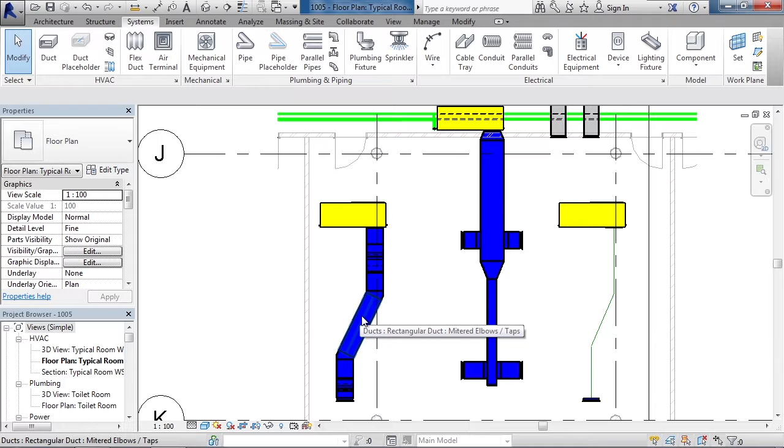Click Modify to deselect. Now, on the duct system on the left, click the same element for the duct, the one that's on the horizontal angle. Dimensions will appear for it, and the properties appear. Now here, you see the horizontal and vertical justifications for this element, which you didn't see for the placeholder duct. And if you scroll all the way to the bottom in the property area, you see two areas, one for insulation and one for lining.

So again, you can only add insulation and lining to duct elements that are actually created with a duct or a placeholder duct that's been converted to a duct. So let's look at how we can add insulation or lining to a single segment of the duct run or the entire duct run or duct system, basically depending on what you choose. So I chose this one element right now. If it's deselected, just go ahead and select it again.

When you select any element of a duct system, i.e. a piece of duct, the ribbon will change, and on the very right, you'll have an option for duct insulation and duct lining. To add either one, all you have to do is click the Add button, again for Add Insulation or Add Lining. In this example, let's click Add Insulation. Now again, the first thing you would want to do is make sure you click a piece of ductwork so you see this displayed.

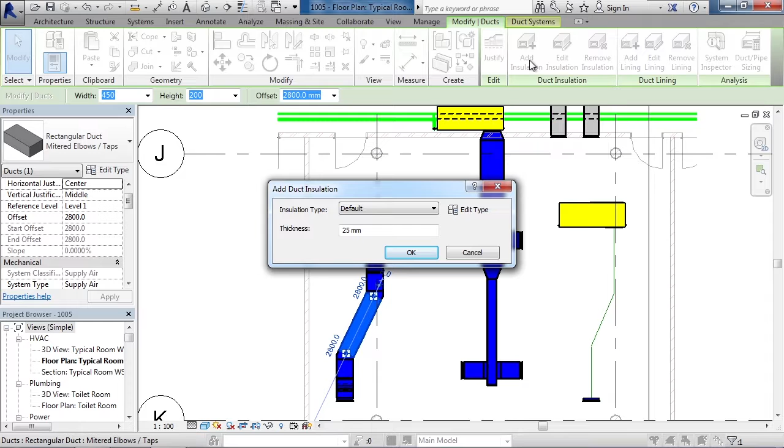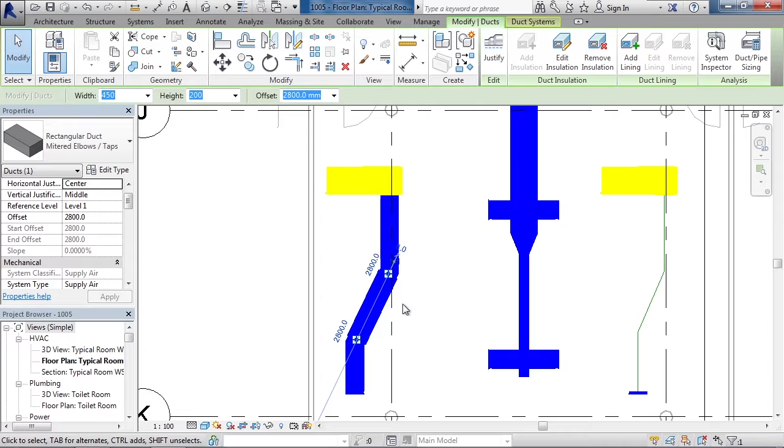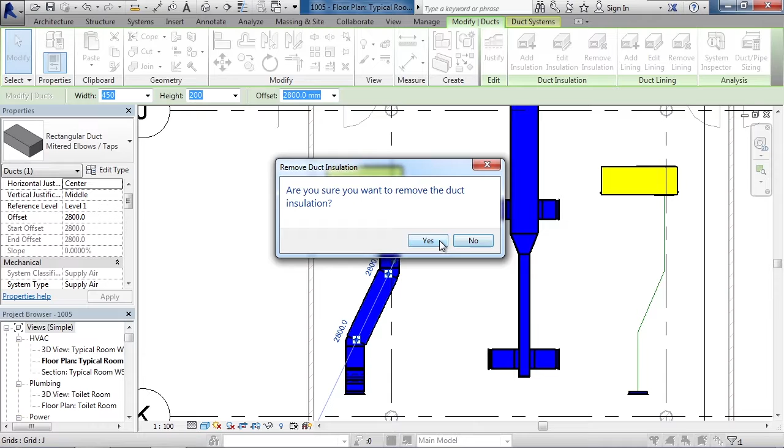Now if you zoom in closer on this duct segment, you'll actually see a dashed line that represents that insulation or lining, depending on what you add to this ductwork. I'm just going to zoom back out. Now, since the insulation or lining has been added, the ribbon now changes, giving you additional options, where you can come in and actually edit the insulation, or you could remove the insulation. So if I want to remove the insulation here, I can just simply click Remove Insulation. It's going to ask you to verify you want to remove that from the actual duct segment or duct system, and then it's technically removed.

And again, I can repeat the same process using Add Lining, where it will ask me again what type of lining type that I want to add and the actual thickness. Again, I can edit the type or add a new type or change the thickness. I'm just going to click Cancel in this example.

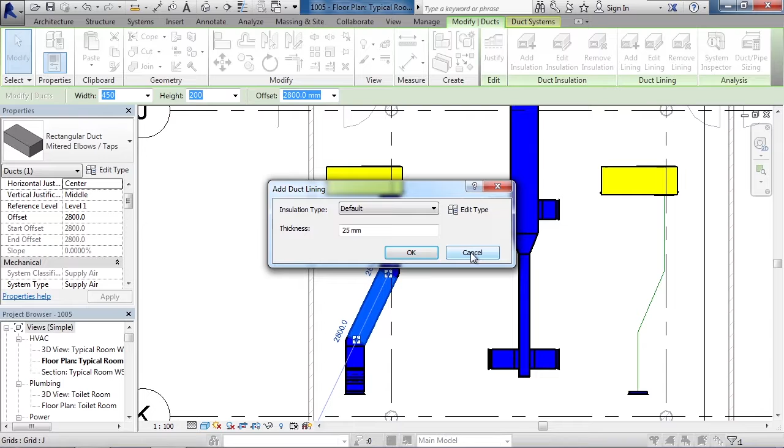So as a review, in this lesson, we looked at duct insulation and duct lining. We looked at the two examples of duct systems or creation of ducts, one using the duct command and one using the actual duct placeholder command. We saw that the duct placeholder does not have the ability to add duct insulation or duct lining. Only ducts created with the duct command, or a duct placeholder converted to a duct, can actually add duct insulation and duct lining. And then we looked at how to add the duct insulation or lining to the duct itself, either its segment or the systems, how to edit that duct insulation or duct lining, and then finally, how to remove that duct insulation or duct lining.